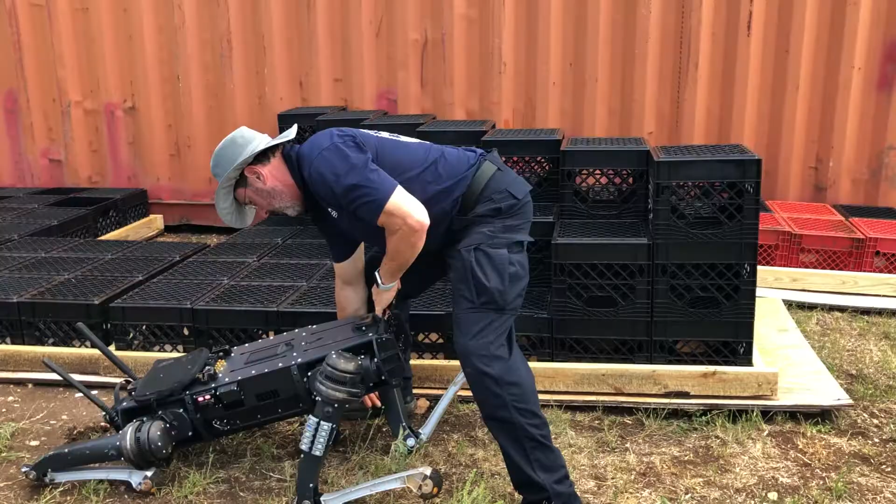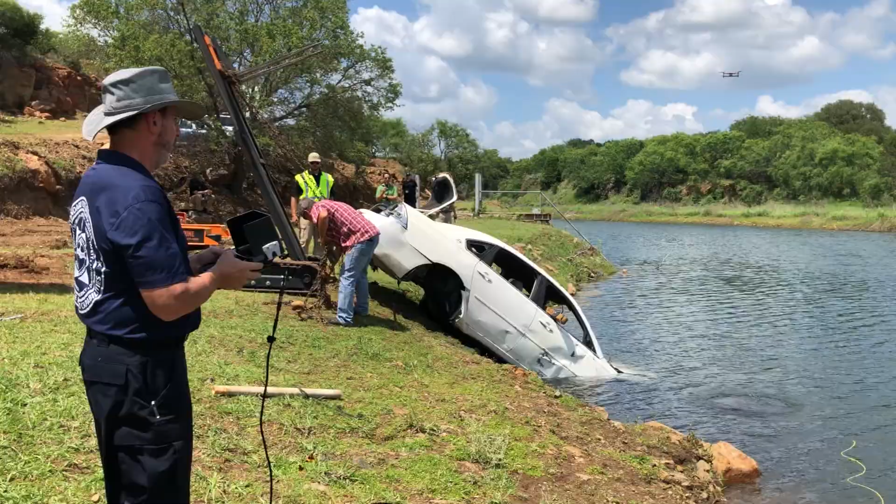My area is robotics. So I lead the project within NIST that's working on developing the measurement science and standards infrastructure necessary to evaluate robotic systems, be it ground, aquatic, or aerial systems, so that we can start evaluating objectively the capabilities and the remote operator proficiency necessary to be effective. So we disseminate our outcomes to promote innovation, increase competitiveness, improve safety, and that's essentially our goal.

And I would say this project is really representative of that mission statement at its core. So in this presentation, I'll be discussing how standard test methods can help enable small unmanned aircraft systems to safely and effectively integrate into our national airspace.

And this is really for all users, but I focus mostly on emergency responders because this work is funded by the Department of Homeland Security in large part. And a lot of the early requirements that we got were from a variety of emergency responders, search and rescue, firefighters, public safety. And if these tests answer their missions, I'm pretty sure we're covering the needs of a lot of commercial and even recreational pilots as well.

So all these tests are going through ASTM International. That's the standards body. NIST does not develop standards. I chair the standards committee. I help shepherd them through the standards process. My job is to sort of do the measurement science work, validate the tests with the variety of folks involved, stakeholders all around. And the ASTM committee are the publishing house for the standards, if you think of it that way. And it's the ASTM International Standards Committee on Homeland Security Applications Response Robots.

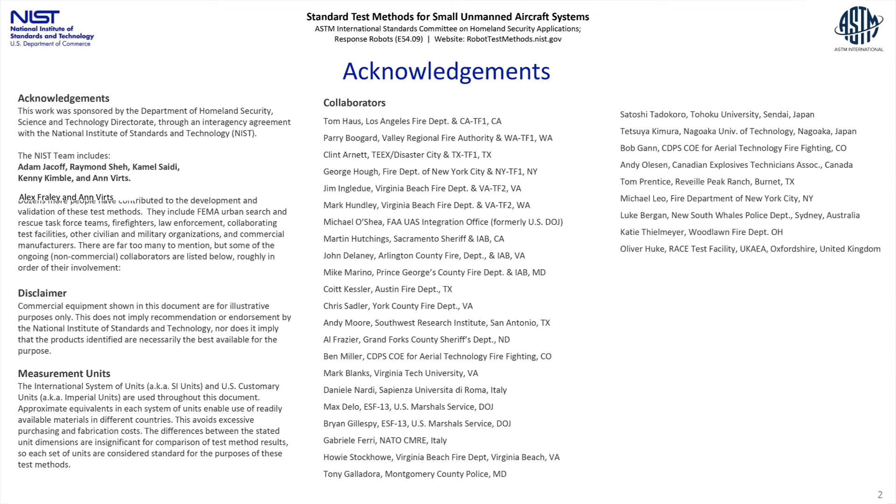So my list of collaborators in this international endeavor is really, really long. I've got a shortened list here. It is just the folks who have been involved from the beginning and kind of stayed involved throughout, but the list is really, really long. This is truly an international effort.

We are in many other countries with the exact same tests, validating them to ensure that they work, not just in multiple languages, you can imagine that, not just with different systems, you can imagine that. It's essentially to enable that standard, that international standard, to sit as the central organizing principle, the tangible task in the middle of all of our conversations. So a lot of times it's hard to talk directly to people in wildly different situations, be it emergency responders across the spectrum or international language barriers. But the tangible standard test apparatus and the performance data that comes out of it is really where everyone starts focusing on the same exact details.

So that's what got us involved in this game. The problem always has been how do emergency responders and others evaluate their systems to understand whether those systems are capable and reliable enough to perform their jobs.

Lately, we're talking in the aerial domain about licensing of remote pilots. That is a very good example of where standard test methods can play a pivotal role. So I'm going to kind of emphasize that in this presentation. But you understand that everything I say about evaluating pilots works similarly for evaluating the system itself.

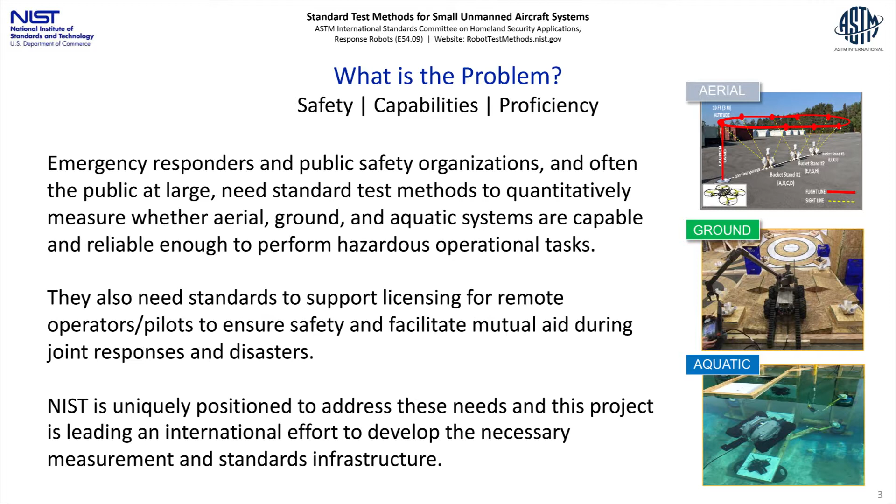The outcomes from the project in general are test methods that go through the standardization process. Those test methods come with apparatuses, performance metrics, data collection tools. What you're going to see here is the poor man's version of all of that. There's a lot of advanced technologies I could bring to bear on the subject from NIST, but we don't do that. The idea is these tests are for everyone else to replicate, so they have to be readily accessible.

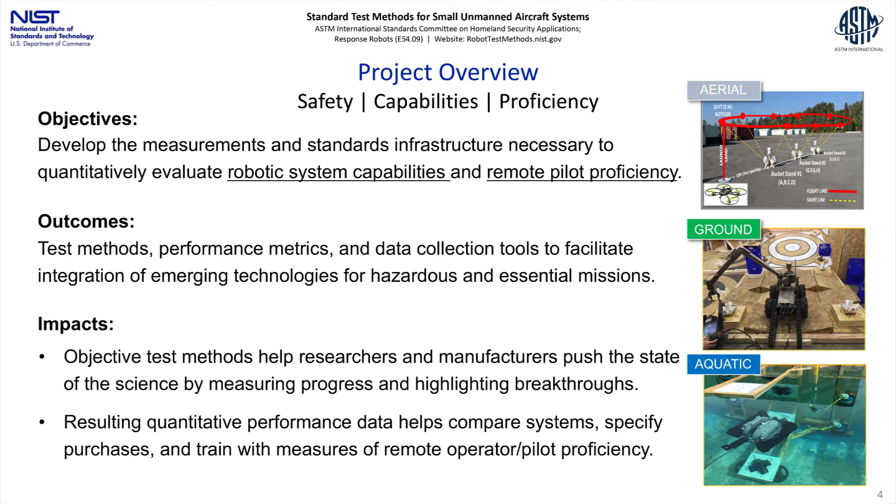Once these objective tests are in the hands of everybody else, researchers, manufacturers, we get to push the state of the science, measure progress, highlight breakthroughs, and the resulting performance data helps compare systems, specify purchases, and ultimately assess operational pilot proficiency for credentialing.

So a quick look at the process. It's iterative and ongoing, and we're doing 5 or 10 concurrent tests at a time because they come in suites. We develop reproducible apparatuses that are cheap and easy, measure combinations of existing capabilities, whatever's commercially available with the manufacturers, and inspire innovation, mostly through competitions, robot competitions, where I inject these tests as challenge tasks.

The RoboCup Rescue is a competition I do every year for the last 20 years, but you may have heard of the DARPA Robotics Challenge or the World Robot Summit, which is going on now. It's going to culminate in October, if it happens, in Japan.

We help guide purchasing and deployment decisions with the objective data that comes out of all those events. That helps focus training and then identify readiness issues, gaps in the capabilities, either in the commercial systems or in your training.

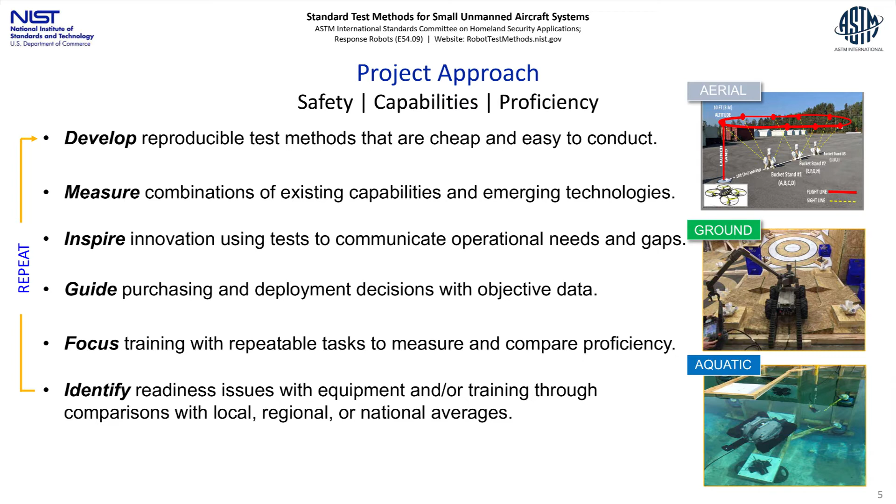Setting priorities is always a focus because there are so many different systems. If you're just thinking aerial systems, there's so many different systems, but we're also dealing with ground and aquatic systems. I don't draw strong distinctions between the three domains because just this last week I saw the first aerial system splash down into the water off Port Hueneme, California, and swim toward one of our underwater tasks, just like it would if it were flying.

So ground robots can fly a little bit if it helps them, and aerial systems can swim a little bit if it helps them. In general, we're just laying out quantitative measures of performance across all those domains. So we try to find the low-hanging fruit wherever it happens.

We do that through requirements workshops with everybody, validation exercises with users, responders, or any users to validate the tests. The evaluations are kind of manufacturer specific and comprehensive, and those are often attached to procurement decisions.

The Air Force just did one for $75 million and used our tests, but we've done now $200 million worth of such evaluations to help guide procurements. What I'm doing really is validating that the test worked for those customers and for those robots.

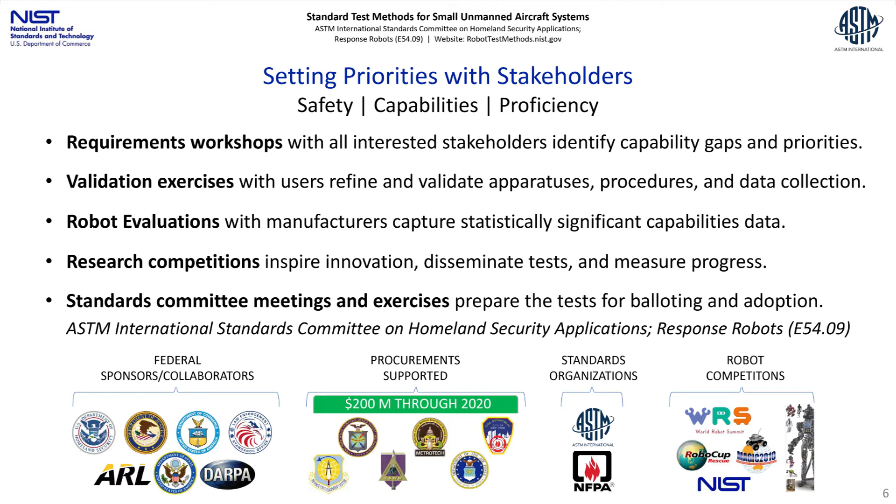The research competitions I mentioned and the standards committee are the ultimate dissemination tool for the end product. That's how you end up with 50 tests across 3 domains in subsuites for mobility, dexterity, endurance, or sensors.

You'll see a lot of crossover from ground to aerial. When we talk about the aerial stuff specifically, I'll mention how it became easy to do from all of the existing ground tests. The only trick was knowing where the drone was at any given time, and what the range to target was. But all of our tests end up being this notion of cheap and easy to replicate, with simple instructions. They're your tests. Go use them to your best effect.

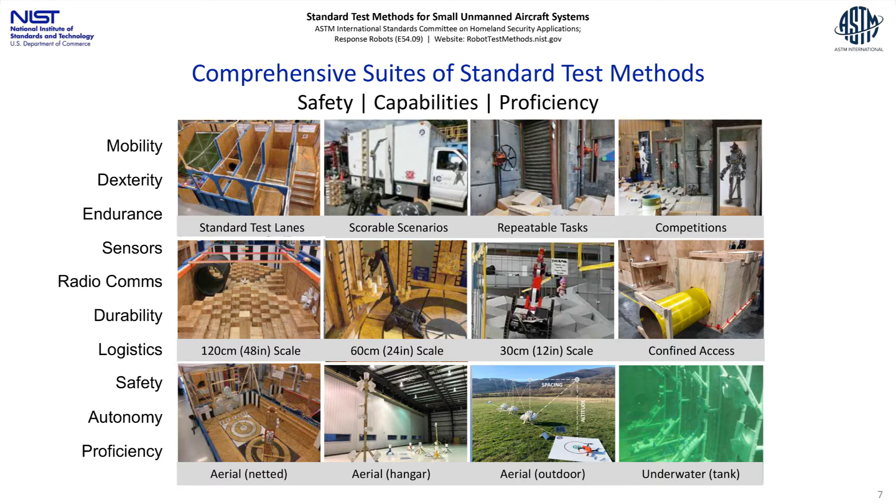So in case you think we're off on the wrong tangent here, that this is never going to work, the project's gotten some pretty high level recognition lately. It started from responder organizations doing guided procurements and training, and bubbled up through the federal agencies we were helping, and turned into an ASTM Award of Merit, which is their highest honor.

That was for cranking out the original standards for the ground systems, which bubbled up to the Secretary of Commerce Excellence in Innovation Award and the Gold Medal Award last year.

And that turned into the Presidential Gears of Government Award. So all of this is essentially for the ground robot suite of tests, which is just a paradigm, an approach that resonates with people. It gets manufacturers talking past their marketing, and it gets responders and others understanding the breadth of emerging capabilities and which ones might help them most.

And so this has now turned into the Service to America Medal. We're finalists for Safety, Security, and International Affairs. That's just settled in October, I believe. But the idea is that the model is sound, and now we are turning this toward aerial systems.

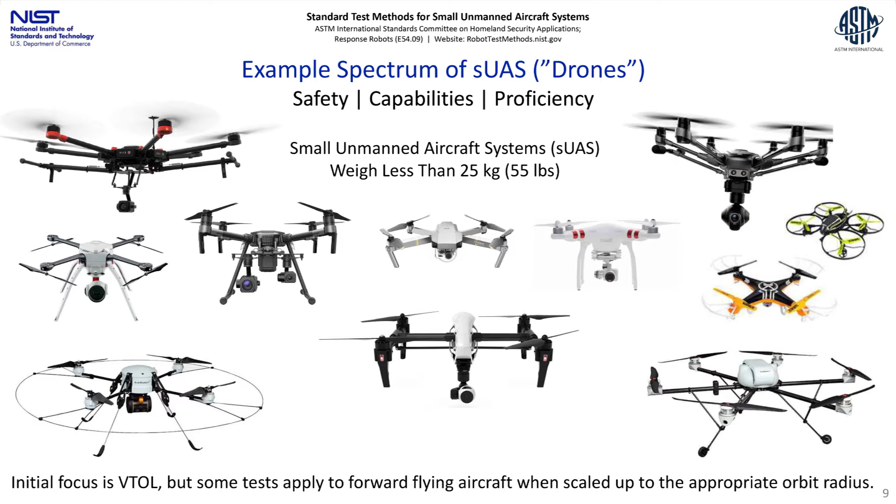But I'm going to focus on VTOL because I wanted to get a complete arc of standards all the way through, from procurement, through training, through credentialing. And I think we're there now as an example, and then we can replicate that example for forward flying and faster or bigger systems.

So how do we measure systems? One example is open area identifications. Call this a group of missions that are popular, or essential, whether it's a wide area search, or more urban, or more specific to objects like a train crash, multiple train derailment, or an individual rail car or tanker truck.

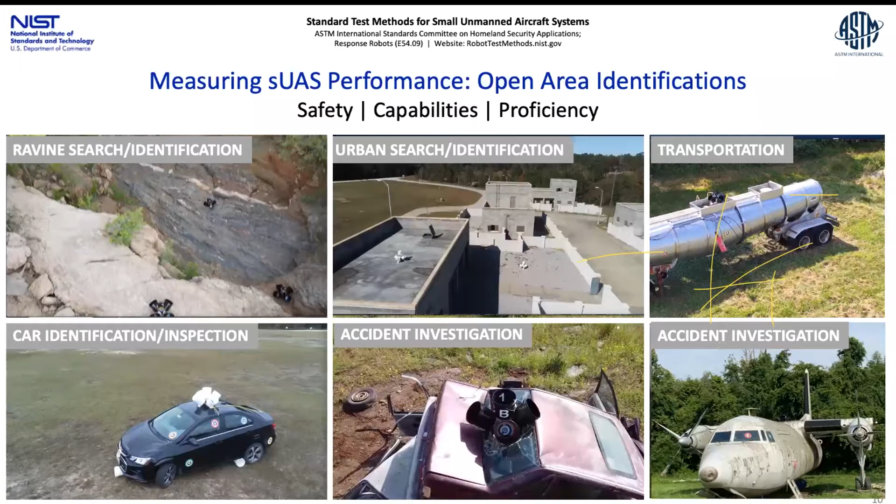The missions break down into, in our vernacular, open areas, or more obstructed areas where there's some danger and proximity you need to deal with, or indoor confined flight. So starting first with the open area identifications, where everyone should really start their process no matter what.

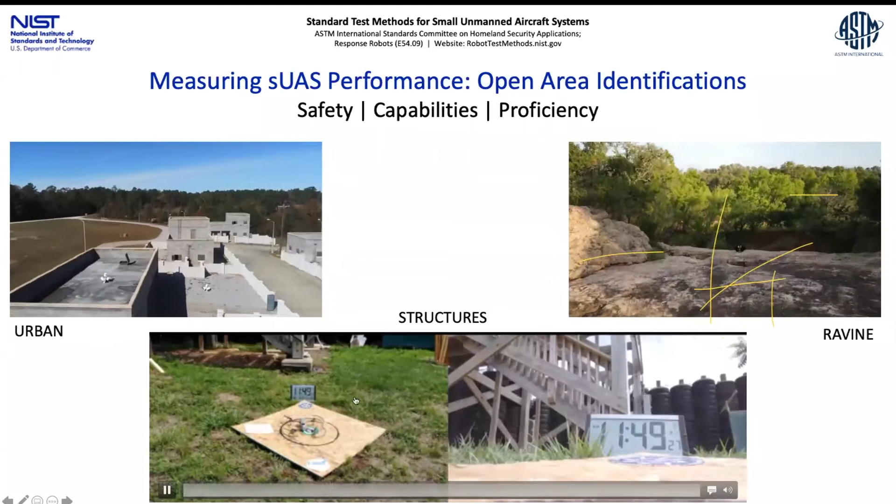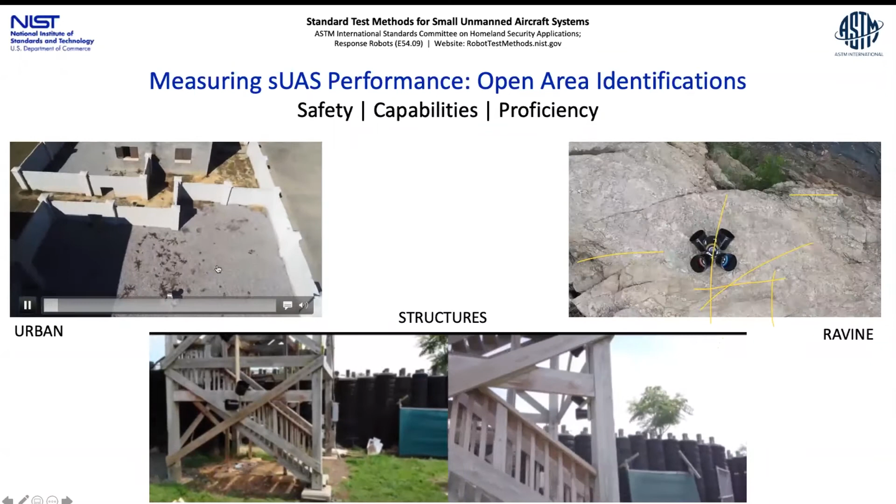Here you see a sort of urban area, a mock site. You see white buckets in sun, and shade out in the open versus up against walls and such occlusions. The black buckets here in the ravine tend to hide a little better in the shadows. And you see at the bottom a structure inspection.

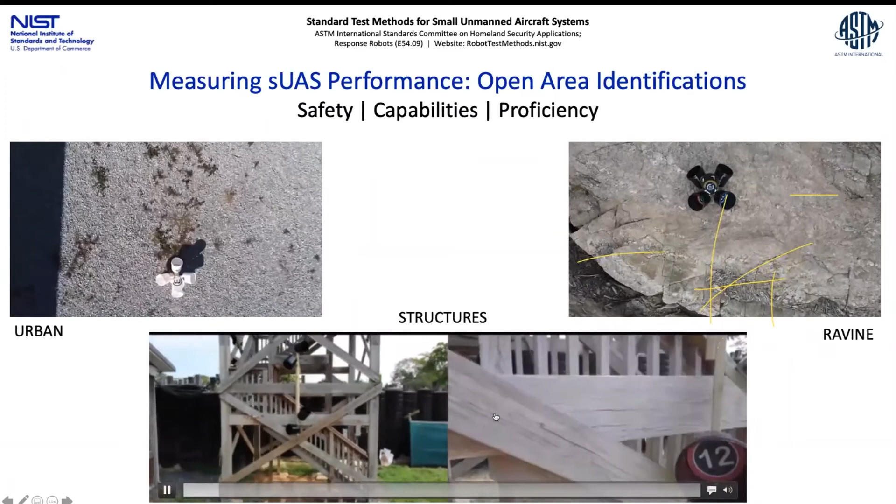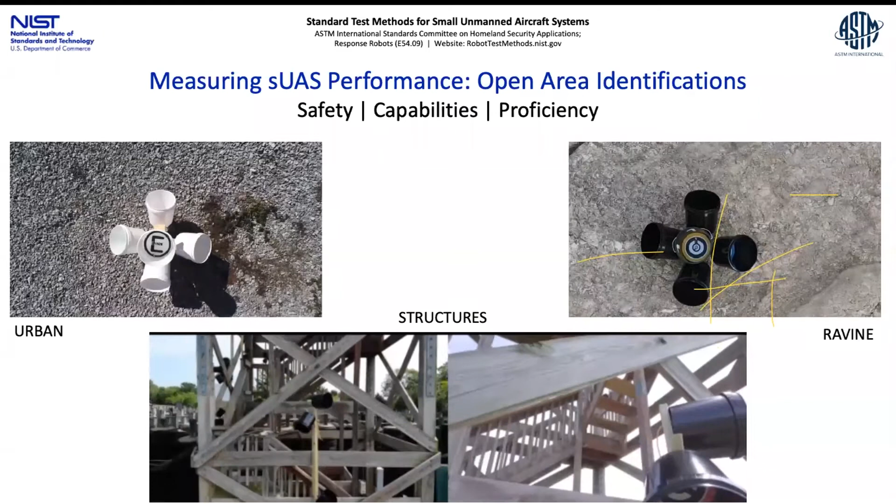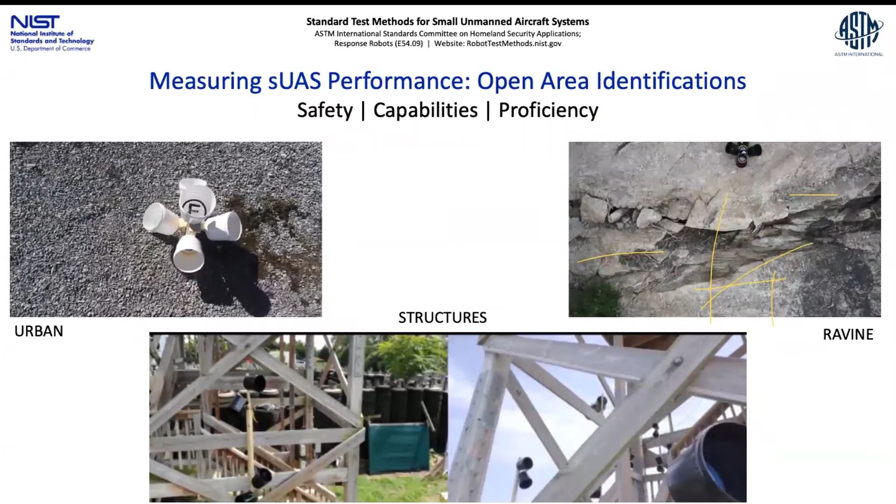These are all using these directed buckets as recessed targets, forcing you, the pilot and drone, to get into that cylinder and look toward that directed target. So this is an omnidirectional target. If you look at the omni stand in the lower frame, it's dual buckets, two buckets converging to a point. The idea here is that with single buckets and targets that are recessed, and certain things on those targets, like the inscribed ring, colored or not, a visual acuity target with different levels of resolution, that's all you need to get in this game and start measuring your systems and yourselves.

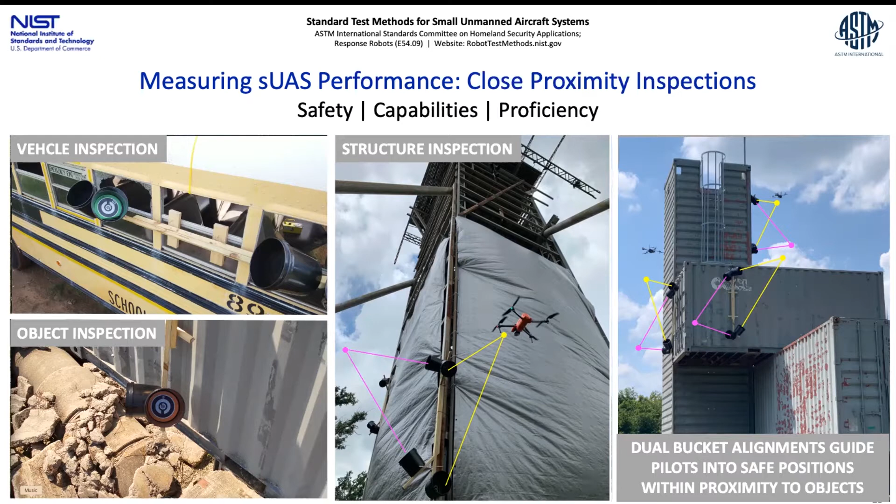The inscribed ring is an alignment cue, it tells you you're there, and the visual acuity target in the middle tells you how well you know how to operate your system to some effect, overlaying some sort of workload. You can see how instrumenting your scenario with 100 points worth of bucket targets can be a repeatable, ongoing scenario at your facility.

It's not so comparable to other people's facilities, except for the fact that they have 100 points in their scenario as well. But at your scenario, in your time of year, presuming foliage is part of it, you're very directly comparable. So you can run people through and get a track record and start monitoring your progress.

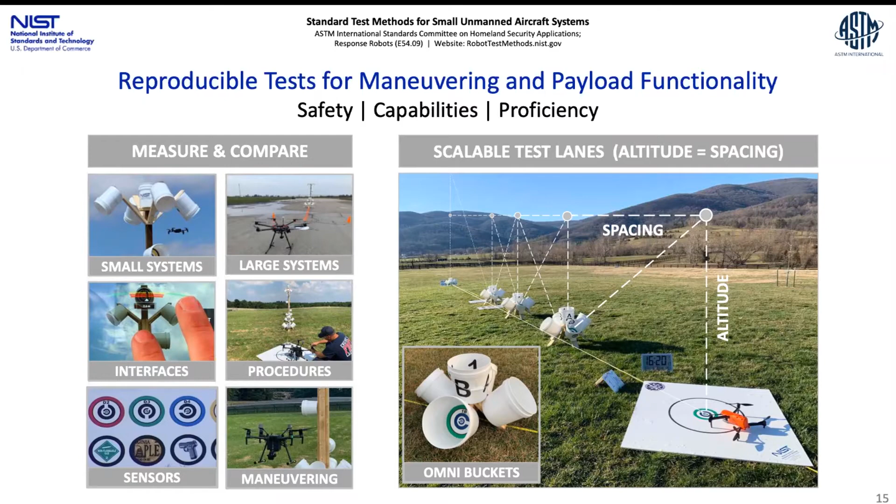Open identifications are one level of difficulty in flying. It leads you to more close proximity identifications. Even if you start open area, sometimes you just need more information because you don't have the optics to do it from a safe hover altitude.

We don't typically specify much in the scenarios except for the target layout positions. In this case, all of these targets are laid out according to a recipe, and the recipe says there will be an omni on top, and you should strike an orbit around just to see if there were 10 tanker cars or 10 vehicles in Times Square.

Maybe you don't know which one you're supposed to look at closely, so you're supposed to do a quick reconnaissance. And then there's always 5 targets on the A side, 5 on the B side, C side, and D side. So there's always 20 targets.

Those 20 targets are worth 5 points for maneuvering, or they're worth 5 points for each incrementally small visual acuity target. So there's 100 points according to a recipe.

Now, we're not telling you what's important in your scenario. You have to define that. But if there's a hazmat placard to read, you probably put a sticker near it. If there's a license plate to read, a VIN number, an interior object on the seat, you probably put a sticker next to it. Also note that these stickers work in thermal as well.

So in general, when you're looking at these scenarios, you need to be thinking, what does it mean to identify a vehicle, an object of interest, or a potential hazard? What does it even mean?

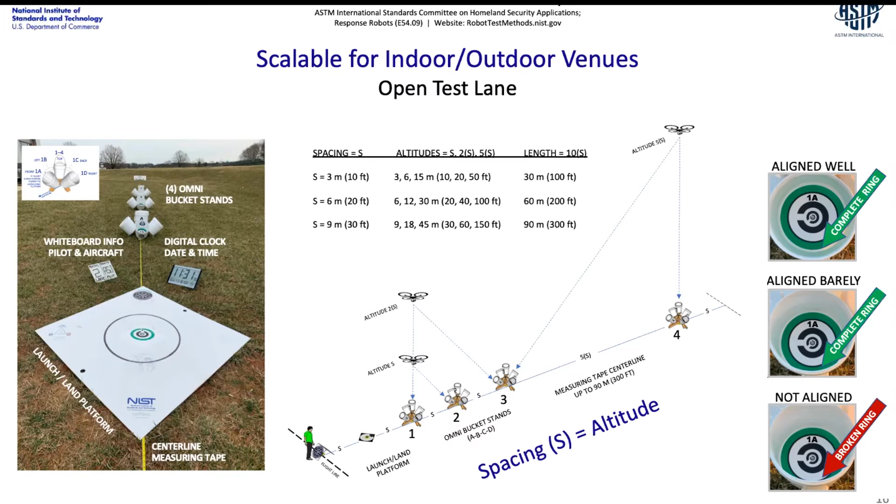So that's sort of an intro to why we're doing buckets. Buckets are there because they're cheap and easy. The stickers are downloadable and printable, so everyone can get on their measuring stick very quickly, very cheaply.

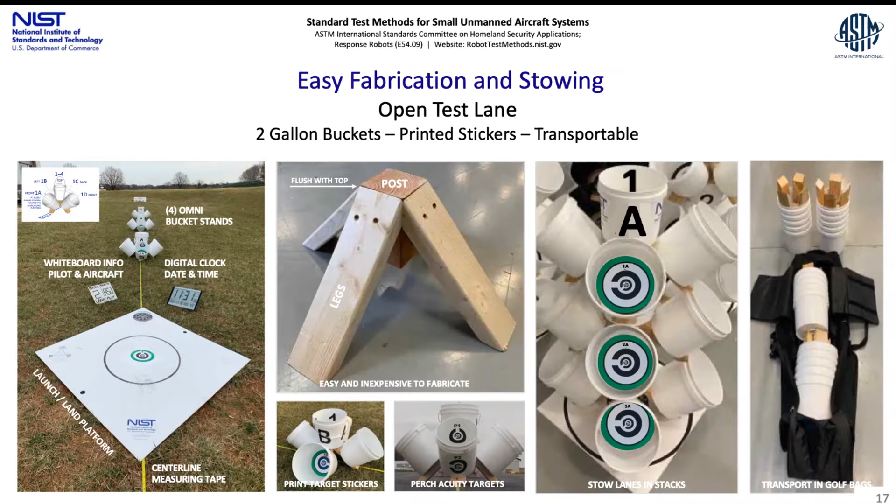And then there are certain tricks for laying out the scenarios so that you're deconflicting airspace if you have more than one drone flying at a time. There's some best practices involved, but it's really pretty loose at this end of the process. The scenarios are yours.

Instrument them using the buckets, and you will have a quantitative result. Oh, I got a couple more here.

These are the dual bucket alignments, close proximity inspections. So now we're expecting you to fly within close proximity. You're going to align with one bucket, the perpendicular bucket. You're going to know it's always safe to fly in on that vector, because whoever laid out the scenario laid it out that way. That's one of those best practices.

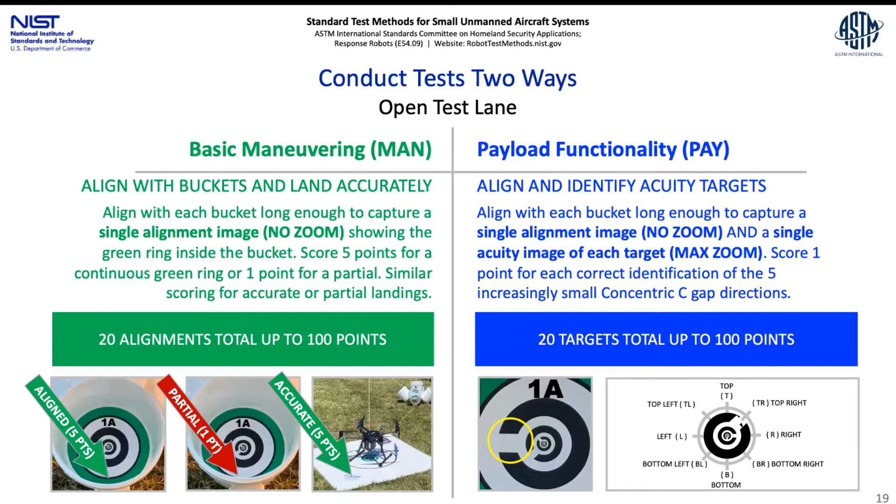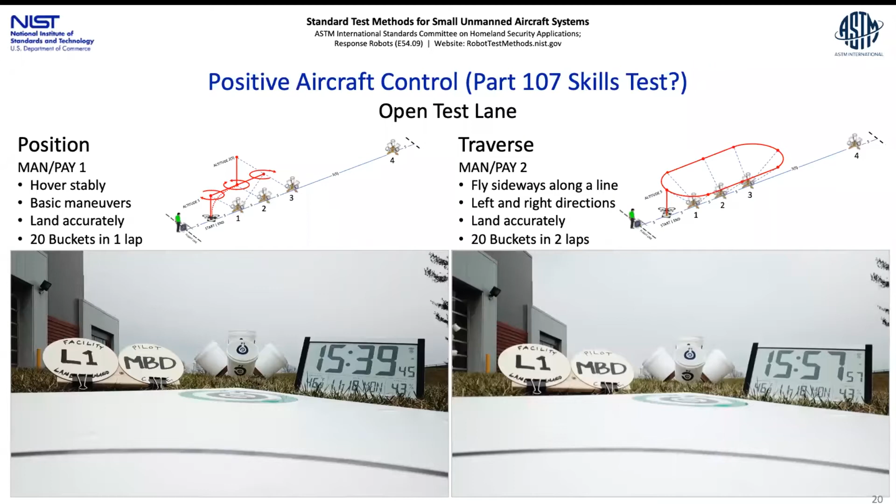Trust the buckets. The buckets are not there to lead you into harm. They're there to provide you a safe position close to the object of interest where you can relax for a minute—not totally relax, but get into a position where you know visibly, because two buckets are aligned, that you are safe, because you built the apparatus and you know it puts you 6 to 10 feet away from that apparatus. So you are safe.

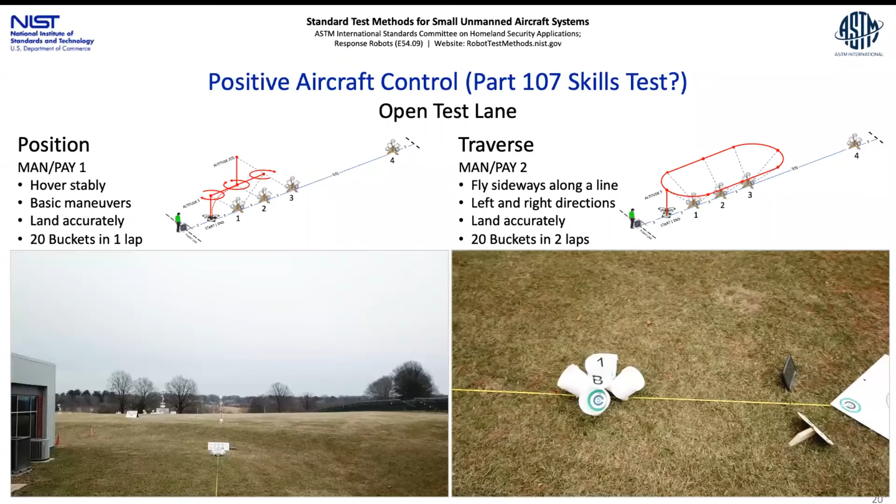Now work your system: zoom, contrast control, focus, capture images, look at the object behind the buckets. They're always put in a place where you ought to be looking anyway. Maybe there's a thermal target inside, maybe there's an actual person, mannequin, whatever.

You're in charge of laying out all the operationally significant things to find. All we're doing is overlaying a quantitative version of that that's practicable and repeatable.

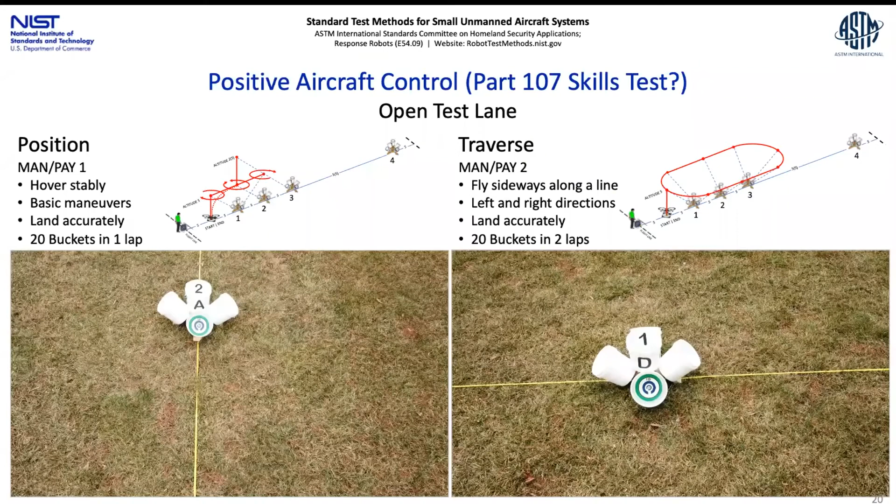So what I would say is, until you're scoring at a certain level in the buckets, you probably don't need to hide much in that rubble pile, because you're just not close enough with your system to discern details or whatever. There's a threshold of performance that's measurable that leads you toward a complete training day and a real readiness assessment.

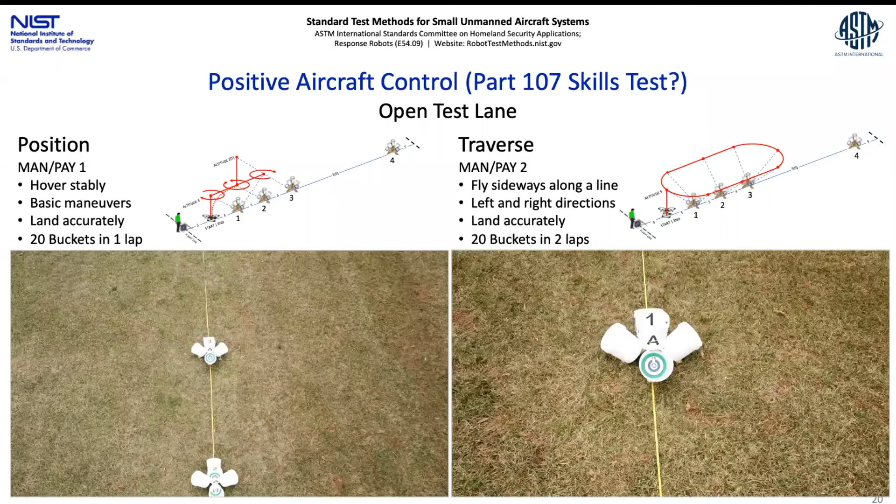The first step toward comparing system capabilities or credentialing remote pilots is to get everyone onto that same measuring stick. That's where standard test methods play a key role. They help manufacturers and users objectively evaluate system capabilities, align those capabilities with mission requirements, and provide a reproducible way to train and measure your capability or proficiency over time.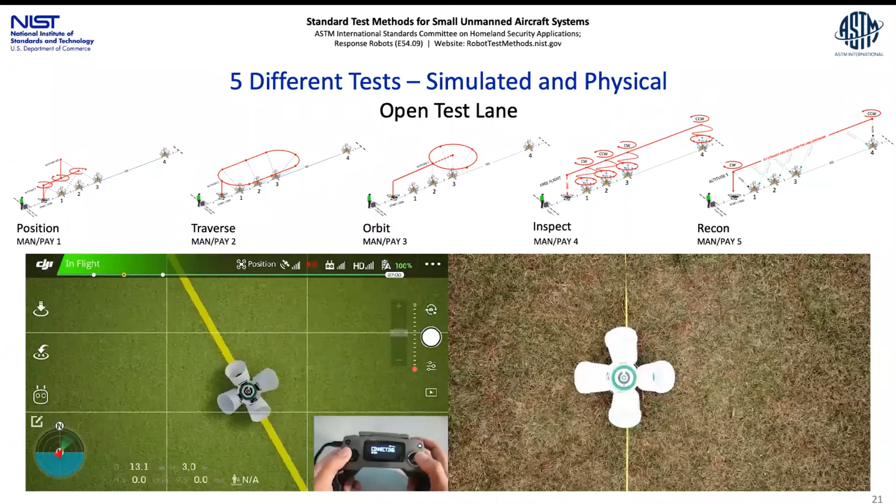This can help public safety, industrial, commercial, even recreational pilots. There's some talk of making drone parks out of these things, where anyone can go in and measure themselves, much like you do on a Frisbee golf course or a regular golf course—making a sport out of it almost. So integrating these standard pilot proficiency tests into credentialing programs in general...

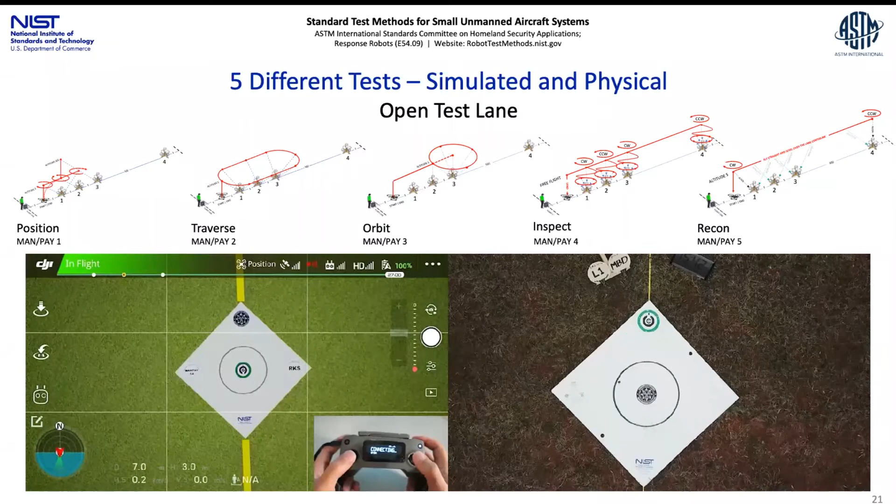We expect we can help enhance the safety of nearby ground personnel and reduce the risk to manned aircraft in the area. For all the obvious reasons, some level of standard testing is just essential as these drones are integrated into our national airspace.

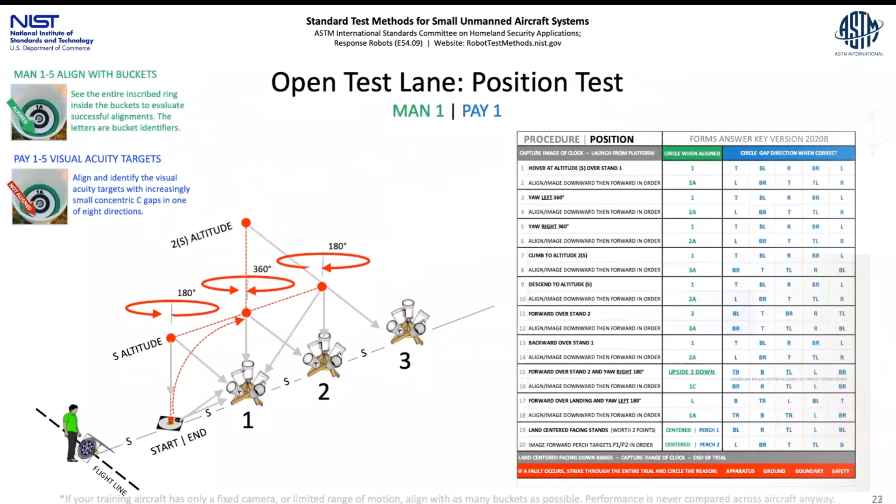The open test lane—called open because there are no obstructions to worry about—is the most basic lane. It uses the Omni bucket stands to define a series of altitudes, positions, and orientations where the drone can see into one or more buckets simultaneously. It's scalable, so it can accommodate various sizes of aircraft flying indoors or outdoors.

As a matter of fact, this lane fits perfectly in a basketball court or a tennis court, when you adjust the spacing between the buckets to be 10 feet, which is equal to a 10-foot altitude for a basic proficiency course.

When you're looking at two buckets simultaneously, it means you're in a relatively precise and very repeatable position, orientation, and altitude—that's the entire game right there. You're moving constantly between very well-defined positions, orientations, and altitudes, no matter the scale of the lane, which means no matter the altitude of the task.

So there are no obstructions—this is where everyone ought to start. As a basic pilot, this is where we would advocate you begin your practice with beyond visual line of sight, or in the dark, or both at the same time, in some indoor basketball court with the lights out. You don't even need to be in the national airspace when you're experimenting with these various configurations or settings.

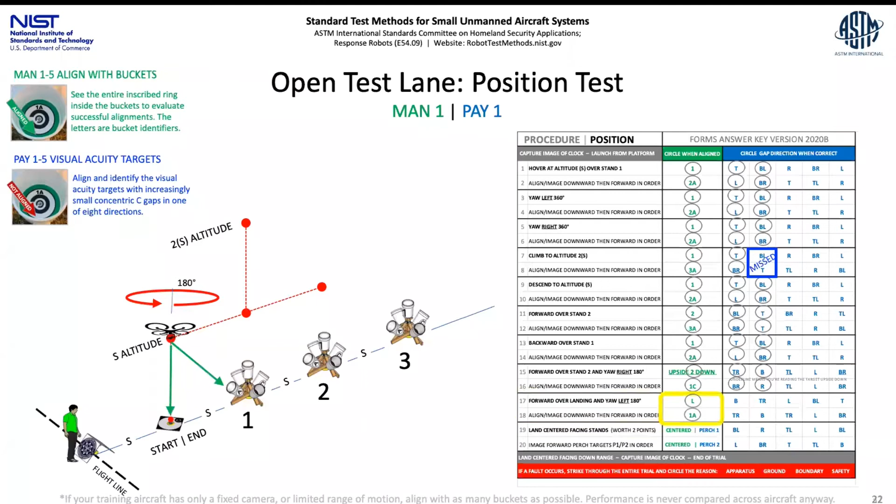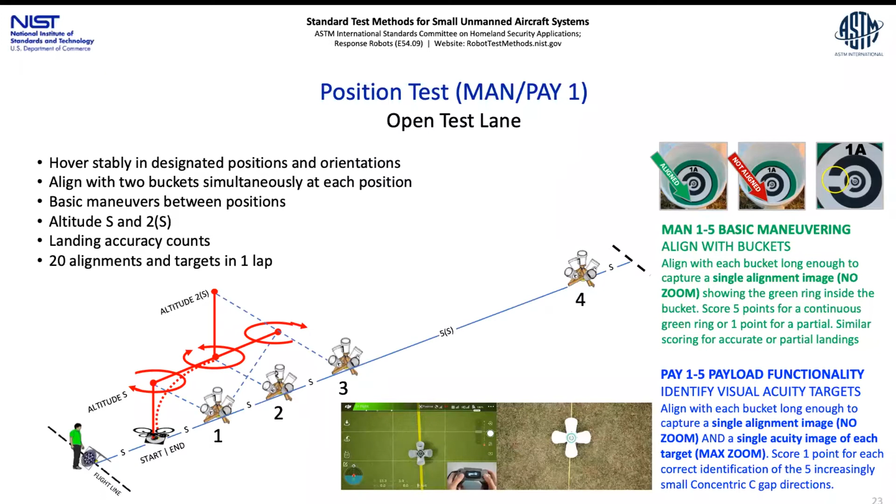Keep in mind that these lanes can be used to evaluate sensors, endurance, package delivery, and a lot of other essential capabilities, and we have tests for that. But in this presentation, I'm going to focus on maneuvering and payload functionality tests specifically. These are the tests that evaluate the pilot skills.

That's why these tests are being replicated at various organizations around the world. This is really what's making these tests pop right now. I think this is where everyone needs to understand the value first.

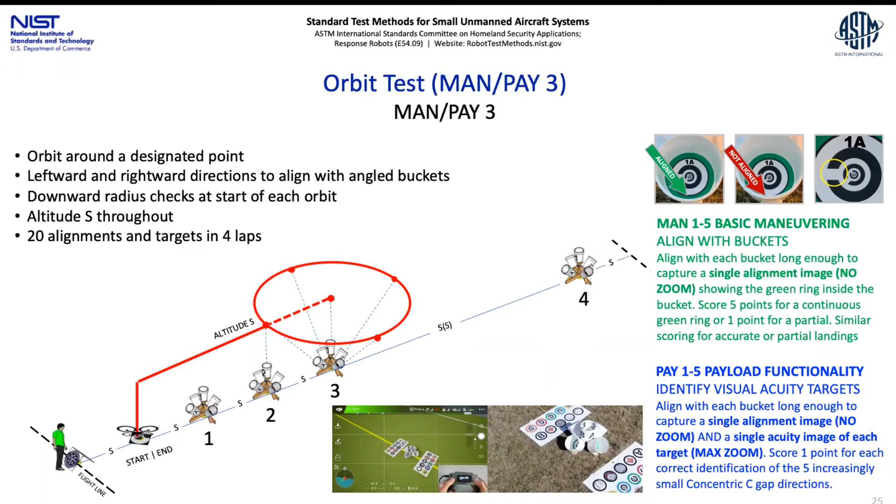In general, the open test lane is designed to set up quickly and stow easily. This is as a result of—in the field behind me, my robotics test facility at NIST—they're out all year long, all the time, as a lane. And we pretty much have an open door policy when it's non-COVID.

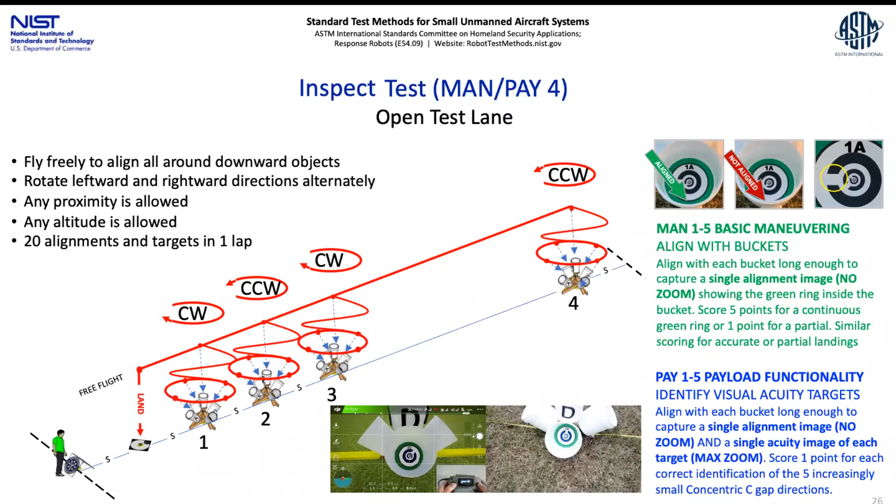So I never expect to bring mine in. However, I understand that a lot of people do need to fly for 2 hours and then bring them in and stow them for 2 weeks. And that's fine. So that's why the trend is towards smaller, more inexpensive, easy, and stowable—even transportable systems. There are some people that transport these things around the state as part of their credentialing process.

Suffice to say, cheap and easy.

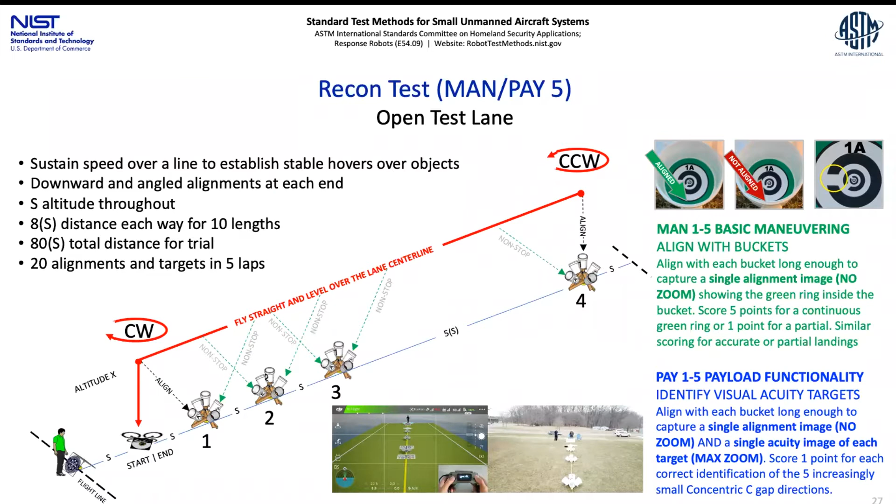The white buckets, Omni bucket stands, are all laid out the same way. They all have a number on top, and they have the letters A, B, C, D around the perimeter going clockwise, similar to how firefighters and police identify buildings. The A is the front, and the A always faces the launch and land platform.

White buckets tend to be used in the standard tests, while black buckets tend to be used in the scenarios. And when we use the black buckets, we invert the coloring of the sticker target so that it's predominantly black.

There are always two ways to conduct every test. There's a basic maneuvering way, and then there's a payload functionality way. They're related, but basic maneuvering is a subset, and it's where everyone starts.

Basic maneuvering, shown in green, requires the aircraft to pause long enough to align with and capture an image of each bucket. That's the alignment task. So it's move, capture an image, move, capture an image, move, capture an image. And you're graded on those images.

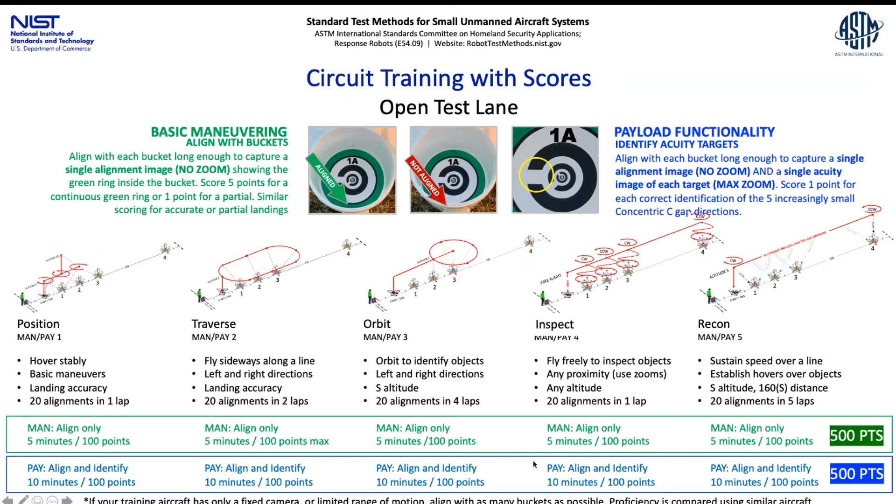Your score is done after the fact, based on those images. Because if you couldn't hold position long enough to snap an image, it's an indication that you're loose in your controls. It's probably a system problem more than a proficiency problem, but who knows? Bottom line is you need to align your expectations to that system's capability, and doing that task 20 times gives you the statistical significance to understand how stable that platform is.

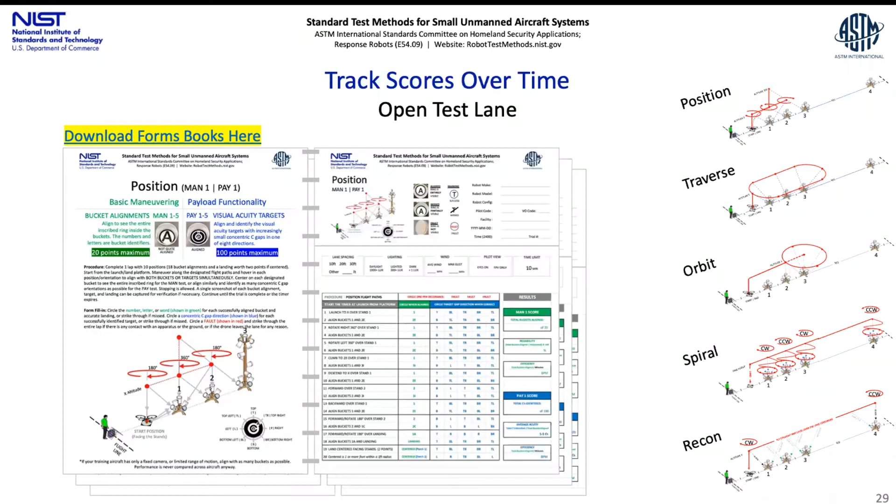So basic maneuvering is a no-zoom image while in that cylinder where you're seeing a completely inscribed green ring. If the green ring is broken, you get lesser points. So 5 points for a full ring, 1 point for a broken ring, and a couple of tests have accuracy and landing included in them as well. Accuracy meaning within a radius of 1 foot from center.

Payload functionality, same idea. You still need to align with all the buckets. You capture the image as if you're aligned, and then you work your interface and start reading into the visual acuity chart. So you start calling out, like we're looking at here: in the circle, left, lower left, upper left, and I can't see, maybe up. So I'm seeing 4 deep of 5, not so bad.

Smallest one is about millimeter resolution. This is an indication of your acuity from that standoff position. And the standoff position is known because you're aligned with 2 buckets.

Taking an image at the high zoom or max zoom gives you an understanding of how hard it is to capture the details in your zoom camera, given the stability of your aircraft, its ability to focus, the contrast.

It becomes a practical level of zooming where you say, I wish I could get the last 2. I think I have enough zoom to get the last 2, but I can't practically do it because I can't keep my gaze on the center of that target long enough to snap a picture. And that's very informative.

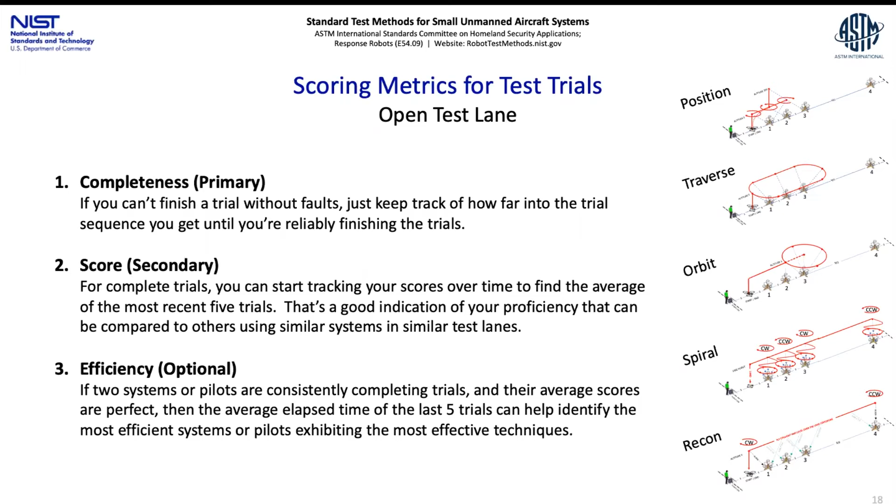So the total point system comes out to 100 points each, 20 different alignments, and 10 minutes. And so if the 107 skills test takes 10 minutes and can be purchased for $100 in apparatus and can be disseminated quite widely and compared very directly, are we not on the right track for something that could be ubiquitous?

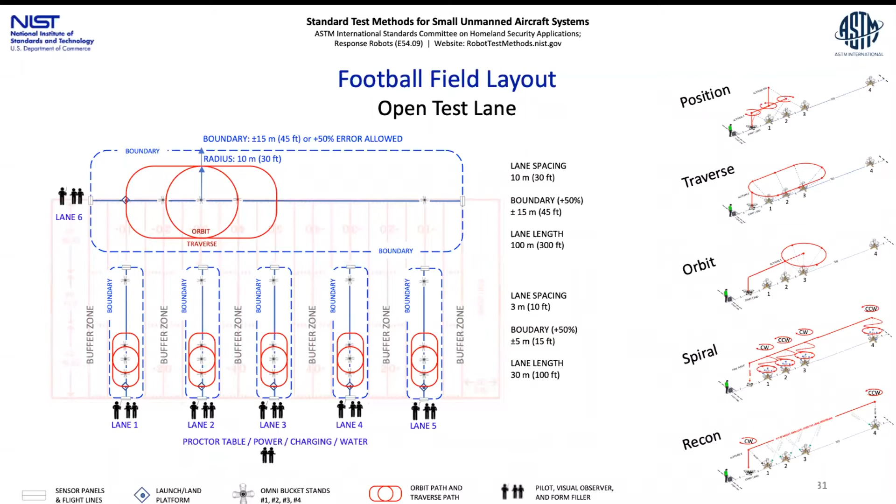There are a couple of hyper-realistic simulations now that we're working with to get our tests implemented in, hyper-realistic like video games. And there's a real need for simulations to add stick time at very little cost, very little danger. There's one thing about just being able to do 30 minutes of stick time every other day, as opposed to having a training day every 2 weeks, in terms of gaining muscle memory on your controller.

Simulations can really help with that. But beyond that, experimenting with issues in simulation, issues that you hope never happen in real life, and certainly don't want to train to because of the fear of loss of the aircraft or the runaway of the aircraft.

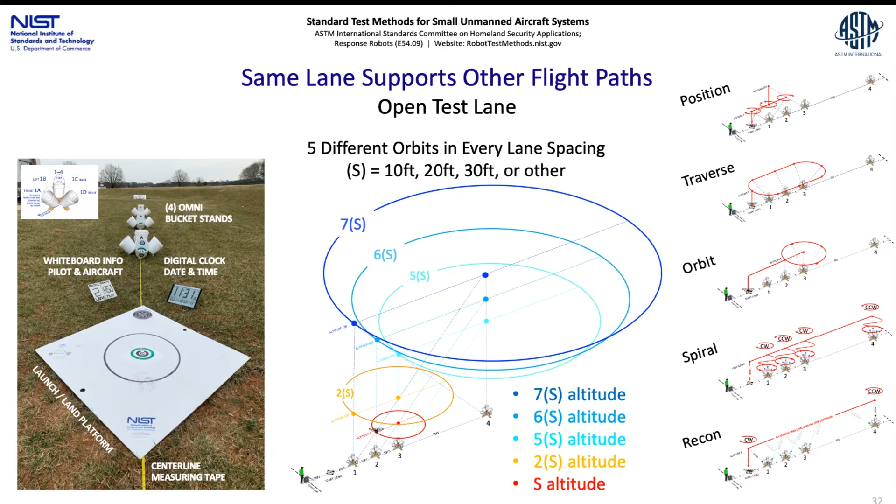For example, a lost comms behavior and a controlled shutdown under duress can be injected into the middle of these sort of simulated tests. So anyway, simulations are coming, and we're injecting the standard test methods into those situations, same as we are into physical validation exercises.

You launch to over bucket stand 1. When you're looking at the form, there's an instruction that says hover at altitude S over stand 1. That works in Japanese and in German to get people to the right place. You circle the bucket number that you're seeing when you align with it, and you check it afterward with the imagery.

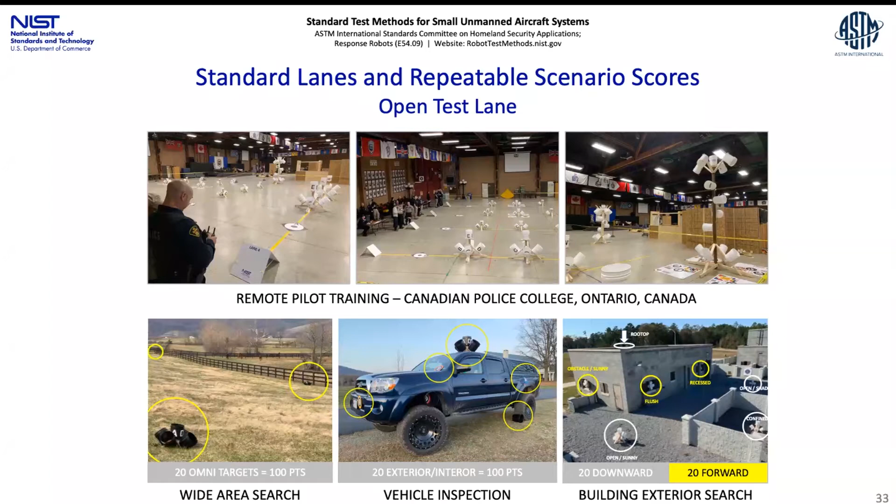If you're working the payload functionality blue section of the form, when you see the arrows, that means they're zooming in best they can, and they're only seeing 2 deep, because the system only has a 6x zoom or something like that. There's nothing wrong with that, that's fine. That system only does 2 deep. You take it to 2 deep and you're using that system to its maximum extent.

When you go to the higher altitude and you miss one, whether it's your fault or the system's fault, it doesn't matter so much as long as you're always comparing the same system across multiple pilots. So you're always safe, even if your system is limited, because if you're running the same system in the same test apparatus, your results are directly comparable. They're less comparable when you compare across systems. But if you see some other system consistently scoring higher, that's an indication that maybe it's time for you to upgrade. And the data works as a sole source justification if you tie that upgrade and the statistically significant data to your need, which is your ConOps.

So position test, we mentioned it's down the center line. All these tests are sort of complementary. There's 5 total. The traverse test, as we mentioned, goes around the perimeter, flying sideways, both directions. The orbit test is not auto orbit capable because it's typically too low and small, but I'm all for auto orbits. And when this lane extends out to an operationally significant size, auto orbits are a very good thing to practice using the same procedure, going both ways, left and right, to identify all sides of the object.

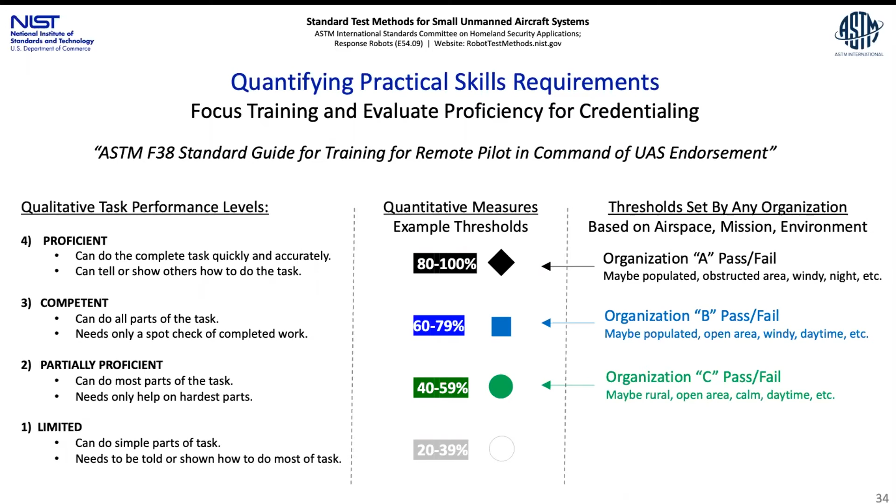The inspect test is more of a free flight. You go wherever you need to inspect every operationally significant package. In this case, it's an Omni stand. You start on top, then you do A, B, C, D, and you do clockwise, counterclockwise, alternately.

And then you do the recon test, which is more a fly straight and level at some speed that is sustainably over the center line. It's not your max speed if you can't stay over the center line. It's about being efficient in your accelerations without blending axes, and in your decelerations, to enter into a stable hover.

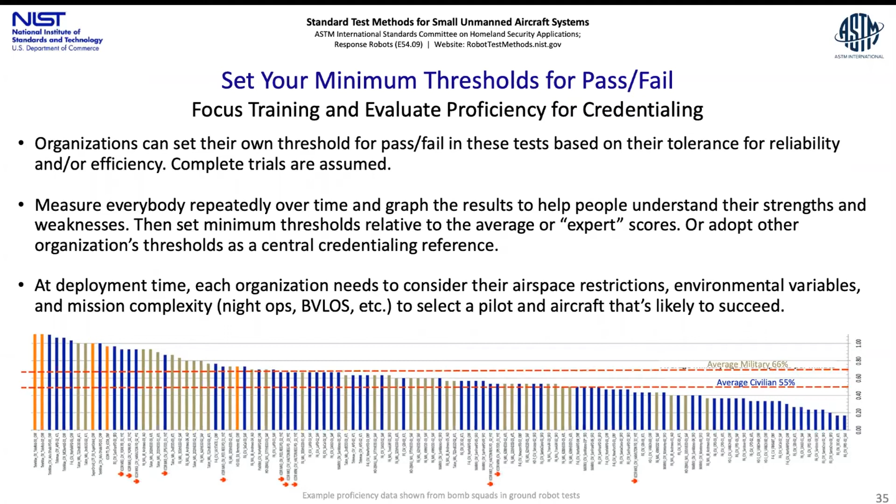Over the object downrange, and then you have these 3 bucket stands near the landing that have images that just pop as you fly over them. It's like landing on an aircraft carrier. If you see the full ring as you're flying by at top speed, you're over the center line. There's also a center line to see in the middle of your view. This test is basically the fastest you go in all of the open lane tests. That's why we put it last.

And all 5 together, remember, it's a suite, complementary. You build the apparatus once and you go through all 5 tests. That makes for a comprehensive evaluation of your proficiency or your system's capability.

If you're doing the maneuvering tests, the tests are 5 minutes long each, so you can go through in 25 minutes of flight time. If you're doing the payload functionality tests, the tests are 10 minutes long, so you go through in 50 minutes of flight time.

So this is why we can see these tests being injected into the start of every training day, so that you have a body of data over time and you can see what your averages are over time. And we'll talk about how important that is a bit later.

So tracking scores, there are books of forms available online you can download. The simplest forms are just trifolds. That's a good place to start.

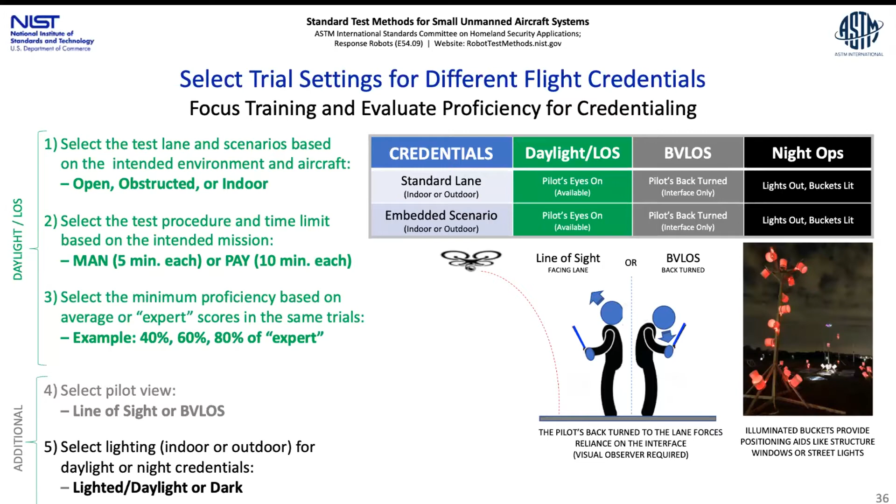But tracking your scores over time is kind of the secret here. Nothing done once indicates anything. Even at an evaluation with someone looking over your shoulder, that's a lucky day or an unlucky day if you're flying for 10 minutes proctored. The key here is to establish a trend, and the trend should be flat. If it's still increasing, it means you're still learning either your system or the test. So when it's flat and it happens similarly 5 times, plus or minus, that's a very good indication of your proficiency.

The way we talk about metrics you can compare is completeness first. That's the primary metric. If you're not finishing tests without making a mistake, you don't need to keep score, and you certainly don't need to keep time. The time limits are there to stop the bleeding early in your process, to make sure you understand you have a problem with one of those tests, but move on, because there are 5 tests and you need to understand all of your skills and which ones to focus more or less on. Which are your strong points? Where are your weaknesses?

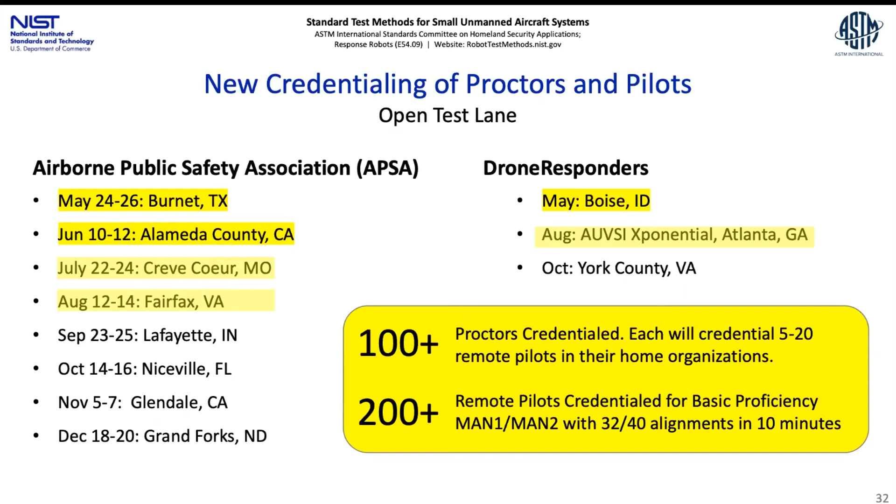So completeness is first. You got to get through all 20 poses without flying away, and certainly never causing a safety incident. These are the kind of faults that end a trial. So completeness means going through the prescribed 20 in a safe manner and in a timely manner.

If you're doing both of those things, then it's time to start keeping score. Keeping score is the shorthand for, of course, I completed it, and I had no faults. And this is how I did. I had a couple of mistakes, I had a couple of lags on my images, so I didn't get full credit. People can set their own thresholds of what

means pass or failure. These tests don't say anything about pass and fail. These are standard test methods. They only tell you how to evaluate yourself and compare yourself. It's up to each individual organization to set their own thresholds.

So score is the threshold you would begin to set, and perfect scores are not out of the question. A lot of people mandate perfect scores. A lot of organizations, responder organizations in particular, want to mandate perfect scores because they're achievable in a timely way. The time limits are ample, they're not there to make it a race. But if you're complete in your trial and you're perfect in your score, then maybe it's time to put a clock on and see where the efficiencies are.

So 2 pilots that are both scoring 100, you can't tell the difference, except that one did it in 4 minutes and one did it in 6 minutes. Everyone will want to watch what that 4-minute pilot does. Maybe there are some secrets you haven't quite learned about what to look at when, how to hold your hands. There are efficiencies to be earned, and the best lesson is from someone who scored better than you.

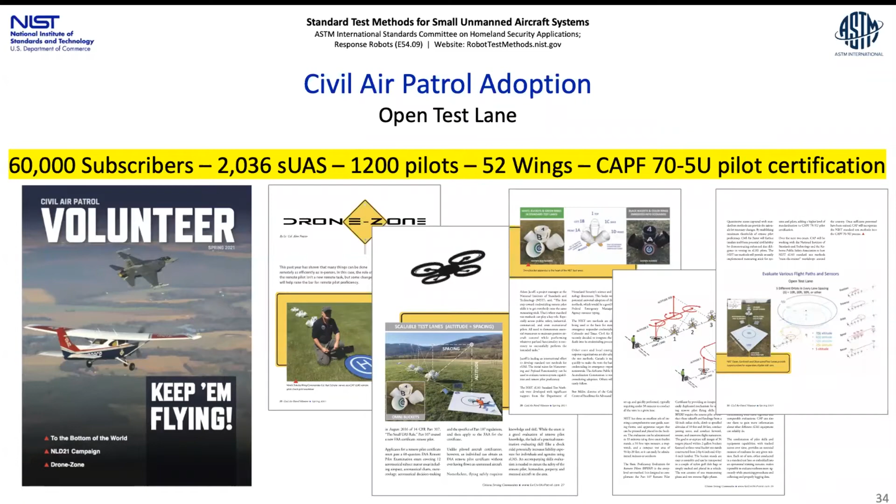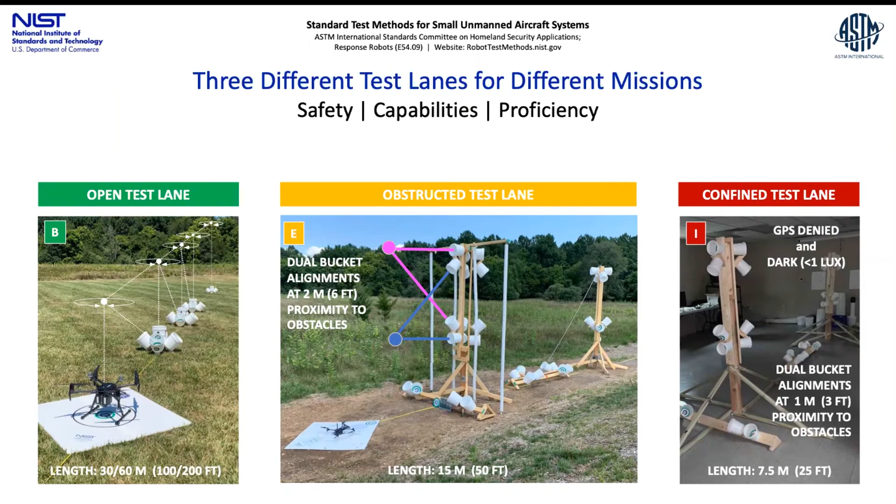Once you lay out this lane, there's a lot of other things you can do with it. Obviously there are different altitudes already prescribed. You didn't even have to change the spacing, and you have up to 7 times that spacing in orbits already designated by looking down and forward into 2 buckets. So if you have a new optical capability, you just want to see how it compares to the old optical capability: take it up to the known altitude, put your targets down at the center of the orbit, and see what you see.

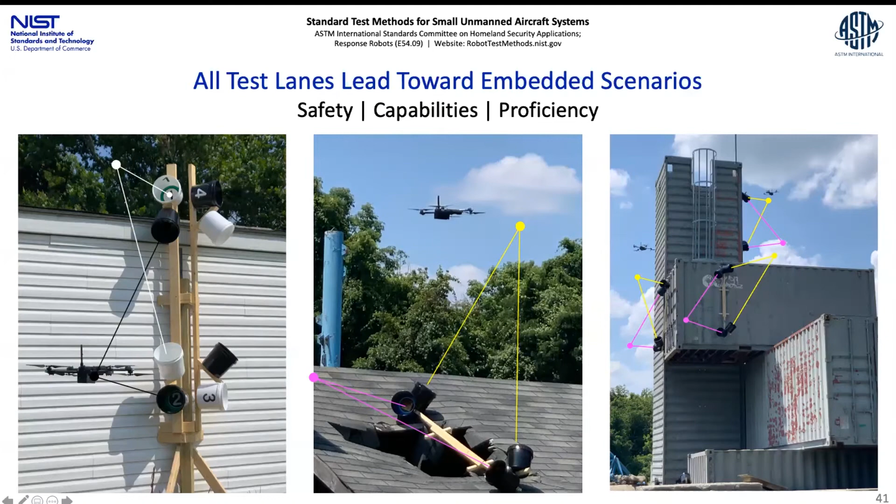So that's the standard open lane. The standard open lane comes with some operationally significant scenarios that are of like kind. So an open test lane comes with open scenarios. Open scenarios imply you never really need to come down below your safe altitude. That's just what open means to us.

You run through your tests in a strict way, you get your scores, you graduate out of those scores, and you start applying those same learned habits, muscle memory, and modes of operation directly into your wide area search, vehicle inspection or identification from high hovers, or your exterior building search from high hovers. The open test lane comes with open scenarios.

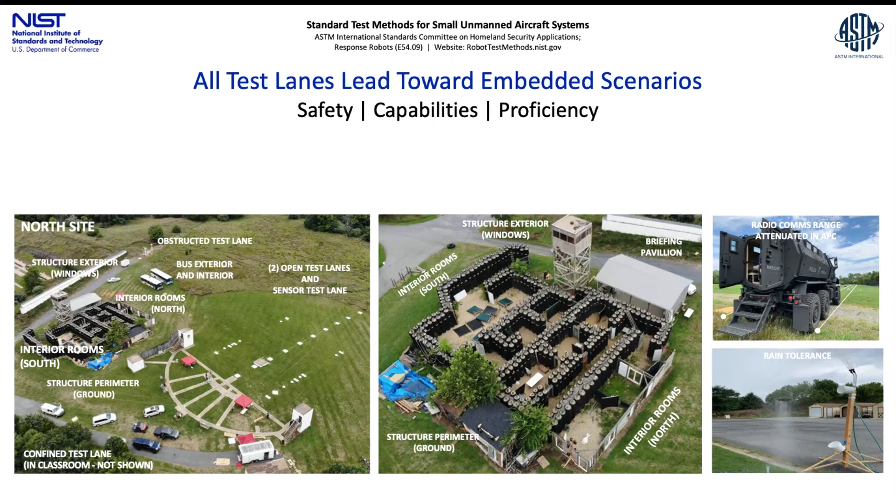When evaluating yourself, some blend is very appropriate. You get scores out of both. The standard test lane scores are directly comparable no matter where or when those trials happened. The scenario scores are a little more your own, and they're comparable within your facility, and probably over time.

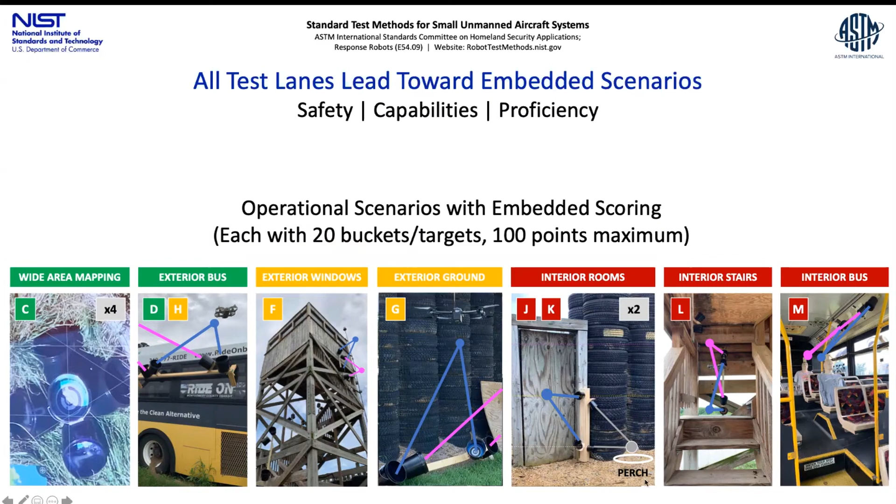Some blend between those is where you want to start thinking about setting your threshold for operation. So there are other standards committees in ASTM, for example F-38, who have defined words like proficient, competent, partially proficient, and limited, with notions for instructors and trainers to try to calibrate with each other. What we do is add the notion of quantitative measures to map onto that.

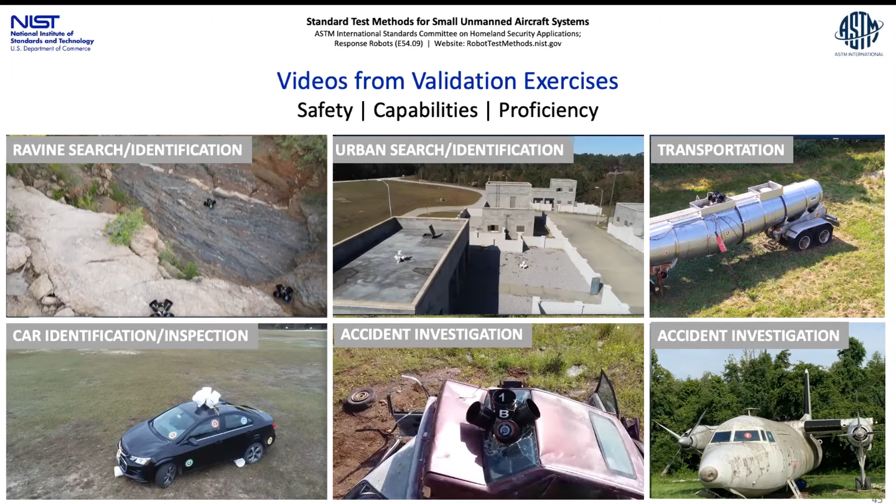You need to decide what numbers go with which level of proficiency, and you need to decide which level of proficiency is required for the operation you are about to undertake, given the weather, given the environment, given the difficulty of the task itself. These are all your decisions. You're just choosing from quantitative data to help make those decisions.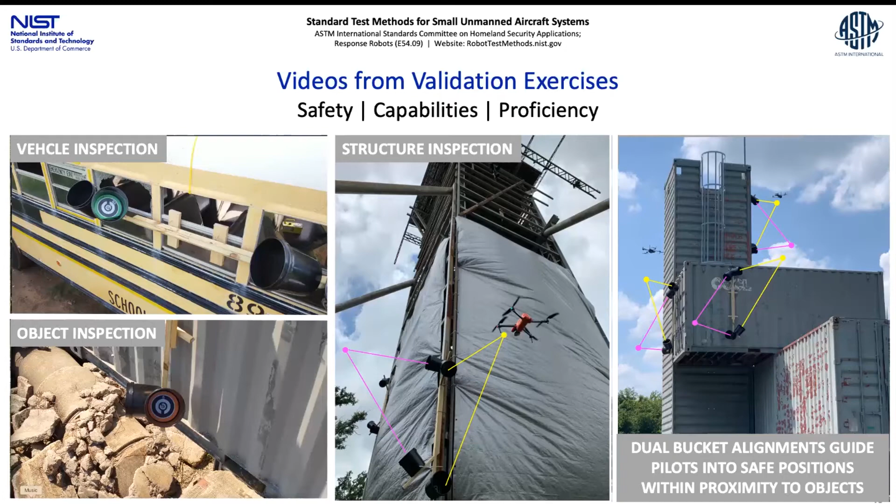So when we're talking about credentialing, and this is where we are now, the tests are starting to be used in this way. Credentialing can be thought of as a daylight line of sight basic kind, shown in green here, a basic kind of Part 107 accompaniment, just the basic skills test. You are not a hazard to yourself and the nearest non-participants. Good threshold to get across first.

Whether that happens in simulation at Part 107 test time, in the same facility, indoors, non-flying, not physically—that's an option. If we're talking about going to physical flights and it happens regionally by some credential proctors, that's what's ramping up right now as a service through the Airborne Public Safety Association and drone responders.

But what we're looking at is, where can this go? So the notion of BVLOS, whether it's to prove that to yourself that you're safe, or whether it's to get a waiver, or whether it's to help the FAA understand that certain thresholds apply. Same can be said for night ops. We have stories for how to conduct all these things that are not different than everything I just showed you.

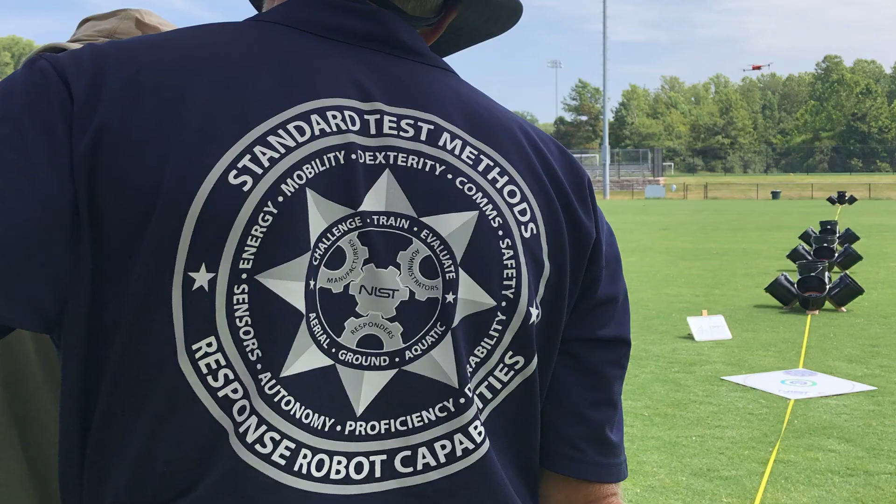It's the same test lane, whether the buckets are lit or whether you have onboard illumination. You do it the way you plan to do it operationally. Sometimes there's lighting in nature—things go down in parking lots at night where they're pretty well lit, and other things are absolutely not, and you need to bring your own lighting with you. These are the things you can practice in a controlled environment, just by turning the lights out.

So whatever the thresholds might be, the idea of the test is the same. The standard test has not changed one bit. It's only a setting for the pilot or the environment that changes.

So as I mentioned, this is kind of underway. Proctors are being credentialed and pilots as well through the Airborne Public Safety Association. They've stood up a series of courses monthly through next year, deep into next year. There's one going on literally right now, August 12th to 14th in Fairfax. So there are 100+ proctors.

Proctors take the 3-day course, graduate from it, know how to build the apparatuses when they go home. They know how to run their own pilots through. They are now deputized to do that for APSA, and then the resulting pilot credential can follow, which is a separate fee through APSA. So 100+ proctors might go home and credential 5 pilots in their home organization, or 20 pilots. We don't know, but the idea is it's going to get geometrically bigger from here.

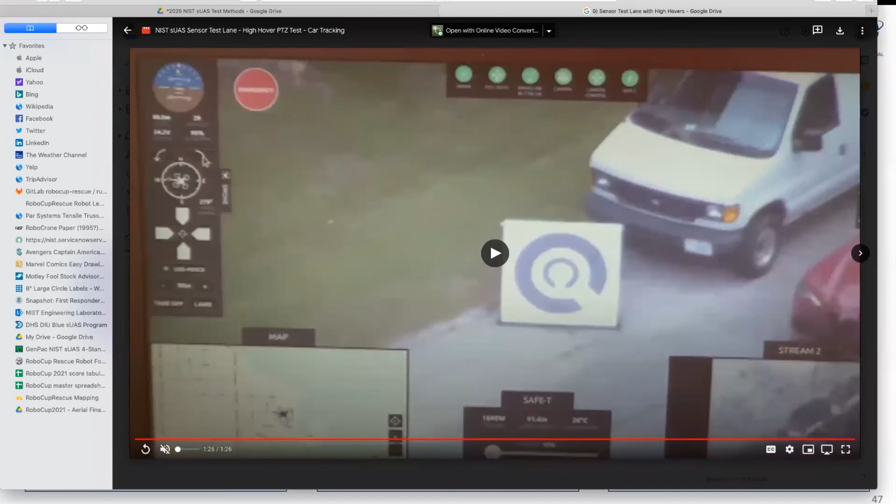So Dave, if that's not enough, I've got more, but it's all of a different flavor, so I think we'll save it for the next installment.

Thank you, Adam. I appreciate your time and the sharing of information.

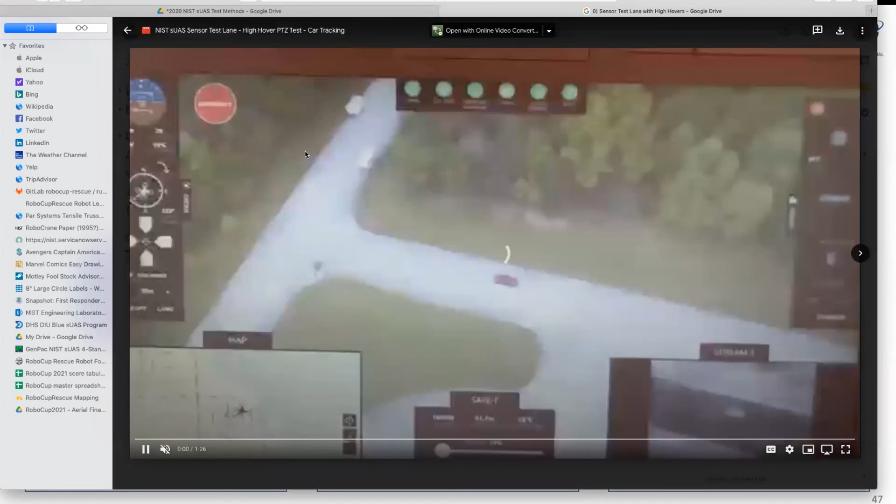What Adam shared with the group is the capabilities of NIST—how his organization evaluates robots: ground rovers, surface floating, submersibles, and aerial platforms. And how he teams with organizations that are willing to assume burden of responsibility and liability for credentialing.

Thousands of organizations around the world are adopting this program, including the Airborne Public Safety Association, FAASTeam International, National Fire Protection Association, Civil Air Patrol, Canadian Transport Aviation Authority, various fire departments, police departments, colleges, lower schools, and everybody else.

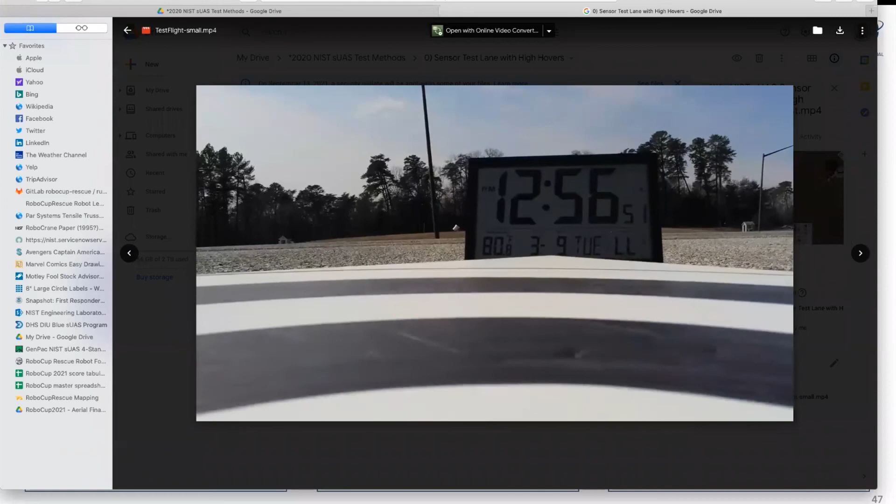But this is a tool to measure yourself. This is not a replacement for anything that the FAA may be asking us to do. As a community, we have a duty to recognize the authority that governs us. In the United States, as it relates to aviation, it is the Federal Aviation Administration. But Adam just shared with us something that is a supplement and can help us show that we are proficient and that we are trying to grow this industry together. So while we await what we need to do moving forward, this is a way for you to measure yourselves. Hopefully what Adam shared is something you can take home with you to make sure you become a better and safer pilot.

So with that, we're going to open it up a little bit for questions. It'd be easier if you just raise your hand rather than blurting out, and I'll call on you and unmute your system. Anyone doing anything? So we'll jump in. Mark Kaler, I see you're already unmuted. How are you doing today? Sir, how long is the credentialing process for proctors?

The credentialing process through APSA is a 3-day course, 24 hours over 3 days, where you learn how to fabricate the apparatuses, sticker them up, lay them out, calibrate, and conduct trials. You conduct trials with the other people in the course, and there's always 30 or more people in the course. On the 3rd day, they open it up to walk-ins, like we did in Texas, where there were 50 or 100 walk-ins from a conference. That was good fodder for you to practice proctoring. So it's a 3-day, semi-intensive, open lane and scenario-only focus to get APSA certified.

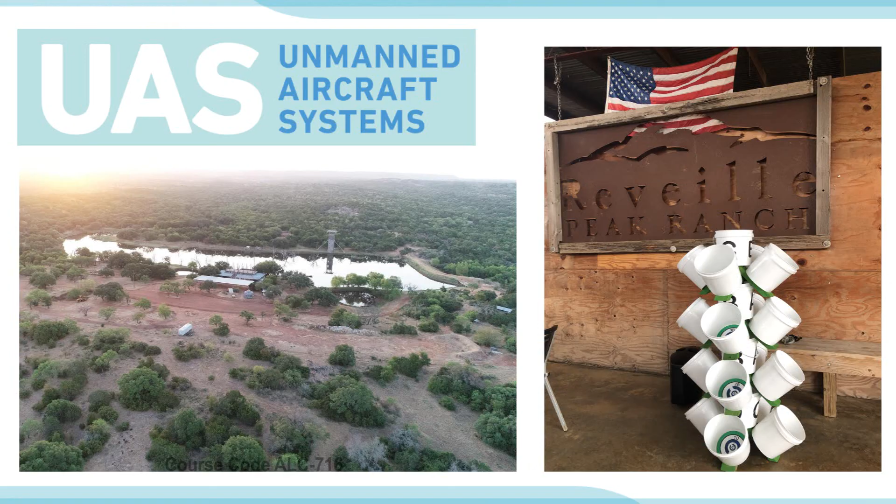Thank you. What is a good UAV model for practicing in regards to capability, durability, and price?

I think that's a little bit offline specific, or out of scope of this presentation. I'll tell you what, I'll drop my email in the chat session right now, and if you'd like to message me on that, I'll be happy to help you out. Great, thank you, it's a great presentation.

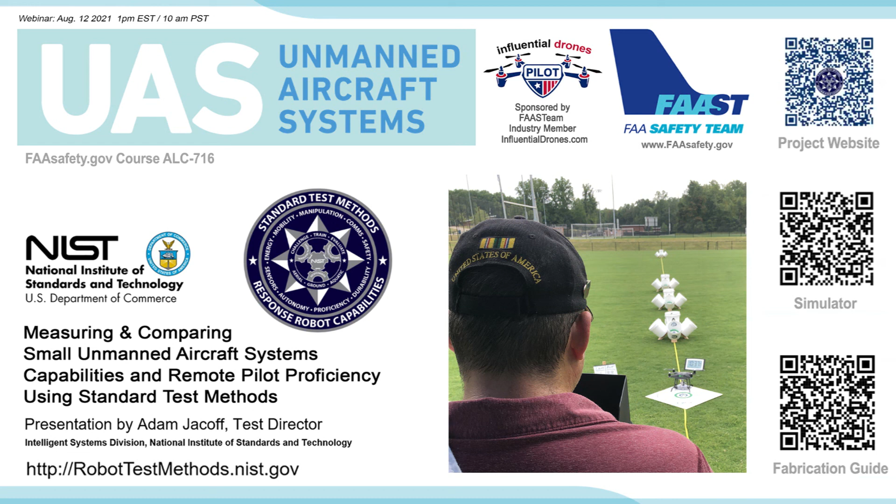Thank you. Yeah, just to understand, as NIST I don't endorse any products. If you see products in my presentation, it's because they were at an event helping with the validation process, and I don't really say what's good or bad. My goal is to help people align their expectations with what they have or what they want to get. But you have a very specific question that makes a lot of sense. What I can tell you is I tend to show video that is good, not bad, because I don't want to show failure or embarrass any particular systems, but you know it when you see it. You don't have to line up to a bucket very long to know whether you have a system that's going to make you look like a hero or a goat. So if you go through a demonstration or watch somebody else try it with a certain system, you'll have a pretty good indication whether you're going to be able to pick up that system as well.

So allow me to translate what I think Adam is indirectly saying. When it comes time for you to evaluate a product, you could always put that product up and through the NIST course and see if it's working the way you want it to—whether you challenge a dealer, a manufacturer, or do something on your own. This program is essentially providing you with a yardstick to measure something equally across the board.

Yes, thank you. For the simulator that you demonstrated that had the NIST course built in there, was there partnership with the sim construction, or was that something the simulator designer just took upon themselves?

So it works well. I don't know of anyone that's done it without us. What we've done is made our 3D object models available to anyone who wants to put them into their simulator. We don't get too involved in their half of it, but they take our actual models and insert them, so that's available. There are instructions on our G drive—I can put the G drive link in the chat. There are instructions for how to inject our test lanes into that free simulator if you're interested, just like our fabrication guide.